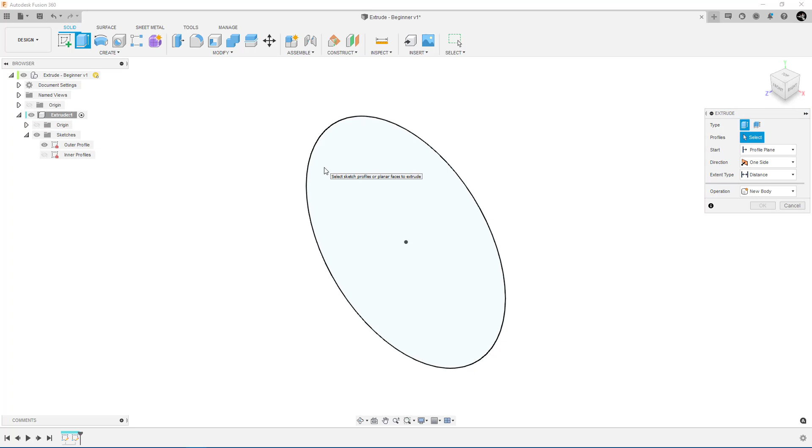On the toolbar on the Solid tab, click Extrude. The Extrude dialog displays, and if there is only one sketch profile in the design, it is automatically selected for you. Otherwise, select the sketch profile you want to extrude. You can drag the distance manipulator handle in the canvas, or specify a distance in the dialog.

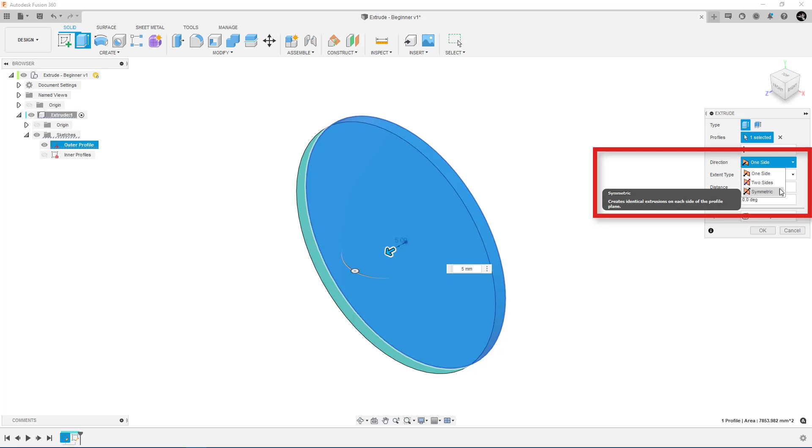For symmetrical objects, you may want to switch the direction setting from one side to symmetric. This lets you extrude the same distance to each side of the sketch plane, so that it acts as a symmetrical construction plane as you evolve your design.

When you extrude a sketch profile that doesn't interact with any other geometry, the operation type is set to create a new body in the active component. When you click OK, the dialog closes, and the new solid body displays in the canvas and in the browser within the Bodies folder in the active component.

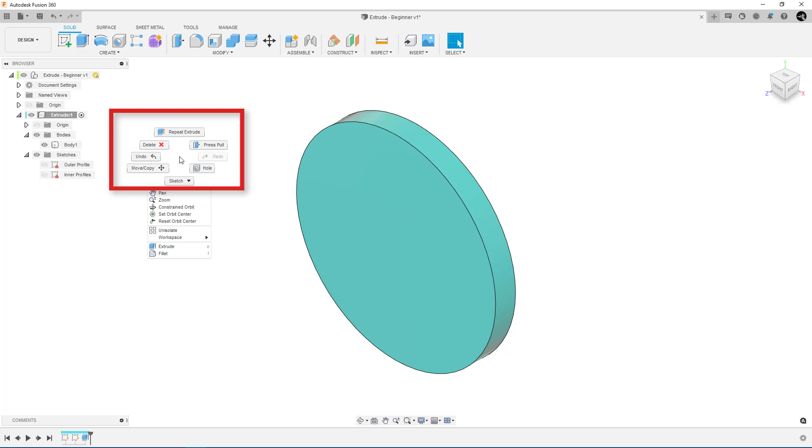You can also extrude thin features from open or closed sketch profiles or faces on an existing solid body. Right-click in the canvas to open the marking menu, then select Repeat Extrude. Then select a face on a solid body in the canvas. Select the thin extrude type.

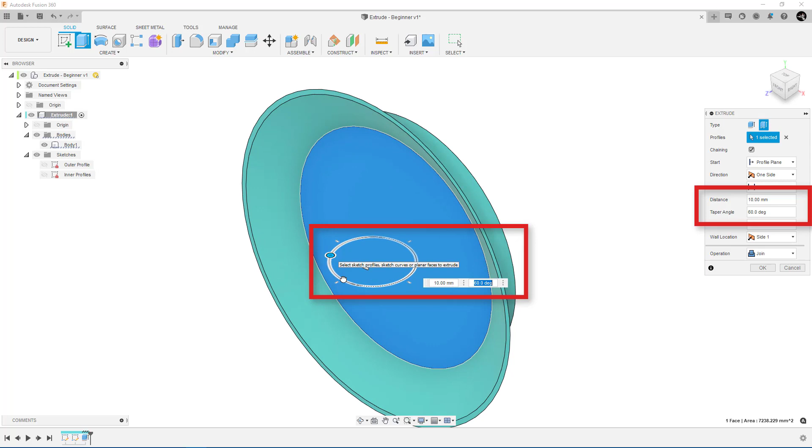Drag the distance and angle manipulator handles in the canvas, or specify exact values in the dialog to adjust the distance and taper angle of the thin extrusion. You can adjust the wall thickness and its location in the dialog.

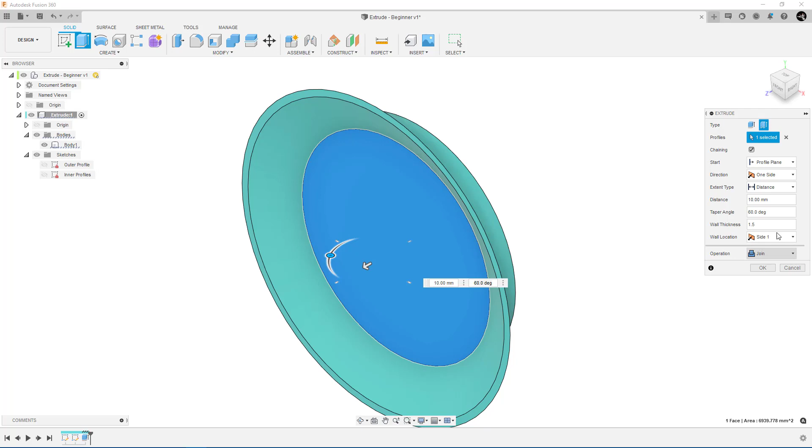When you extrude a face in a direction away from the existing body, the operation type is set to join the new feature with the existing body. When you complete the Extrude command, the new geometry becomes part of the existing body in the canvas and in the browser. However, the thin extrude feature is added as a separate feature in the timeline.

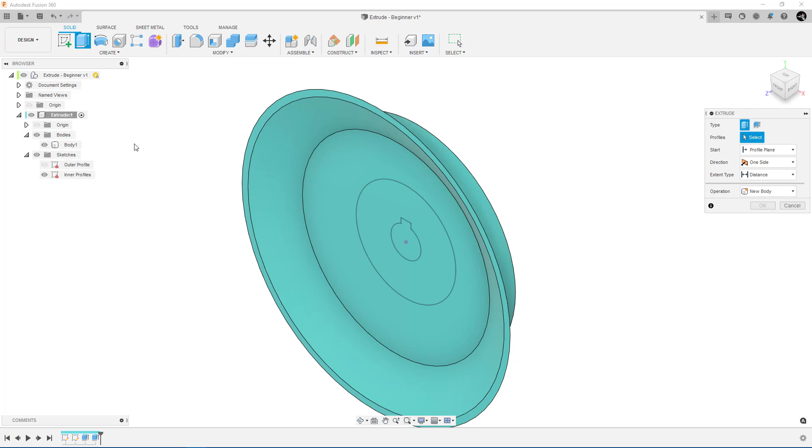You can also use the Extrude command to remove material from a solid body. Press E on the keyboard to start the Extrude command again, this time using its keyboard shortcut. Select the sketch profile or face on a solid body in the canvas that you want to remove material from.

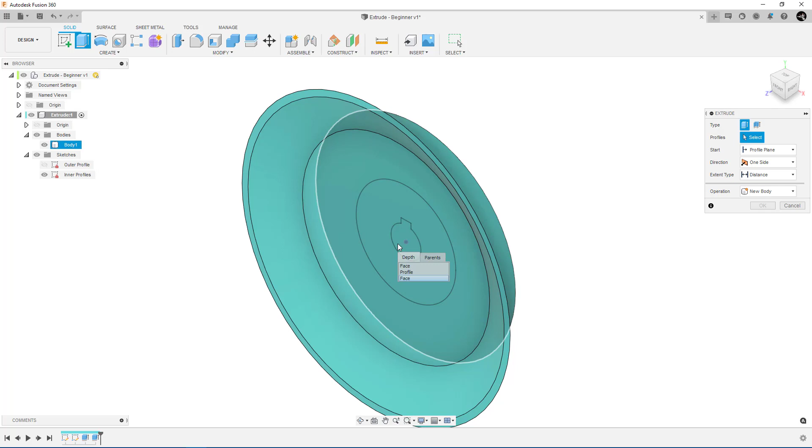If the geometry you need to select is obscured by other geometry, left-click and hold down the mouse button for a moment. A context menu displays a list of all the geometry layered beneath that point. As you hover over each item in the list, it highlights in the canvas to help you select obscured geometry more easily. Click an item in the list to select it.

Drag the distance manipulator in the canvas. When the new extrusion overlaps an existing solid body, the operation type automatically switches to Cut, and the area to be removed from the existing body is highlighted red in the canvas.

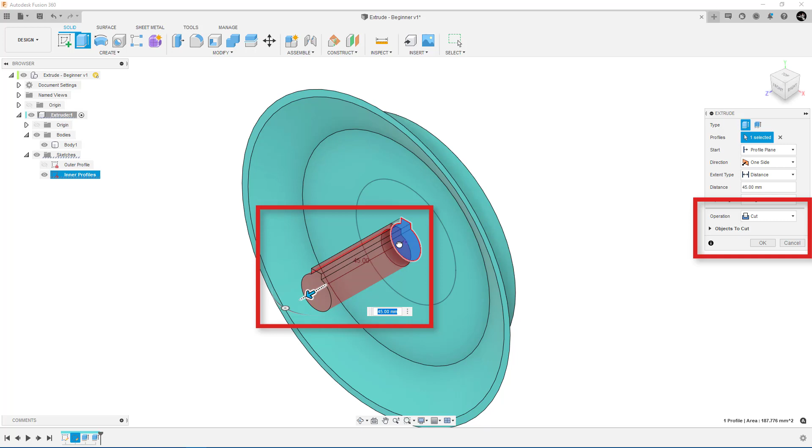Click the flat faces on the view cube, like front, top, or right, to switch to any of the orthogonal views. Adjusting the view can help you validate that you're making accurate adjustments to your design in real time. For instance, if you know you want the cut to remove any material in its path, even if you change the shape of the body in the future, you can adjust the extent type setting from distance to all.

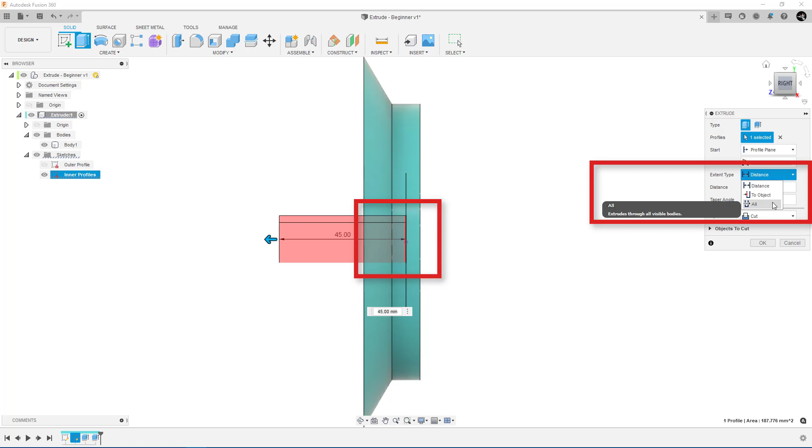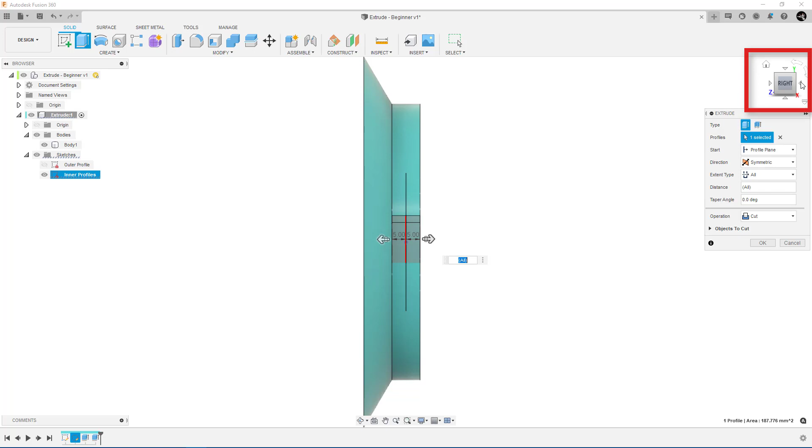If you're modifying a body that was created symmetrically, you can adjust the direction setting to symmetric, and the extrusion will cut through all the material on both sides of the profile plane. Click the arrows on the view cube to rotate the view by 90 degrees in any direction, and inspect the body to ensure the material you're removing with the extrusion is exactly what you intend to remove.

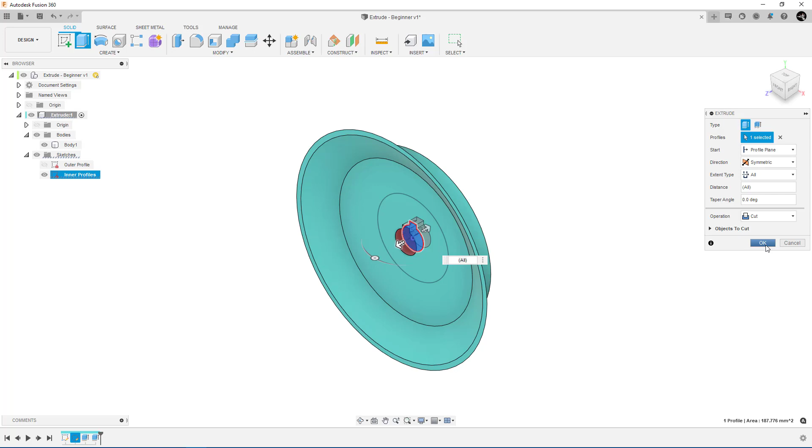You can also click the corners of the view cube, or click the home icon to view the design from an isometric angle. When you're happy with the result, click OK. Although all three extrusions are part of the same body, they appear as three distinct extrude features in the timeline, so that you can modify them and use them separately as you evolve your parametric design.

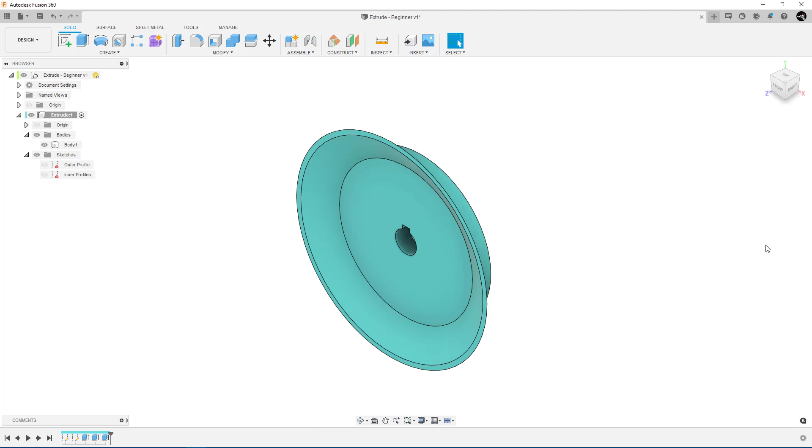Now you know how to use the basic features in the Extrude command to start creating solid bodies from sketches in your own designs in Fusion 360.